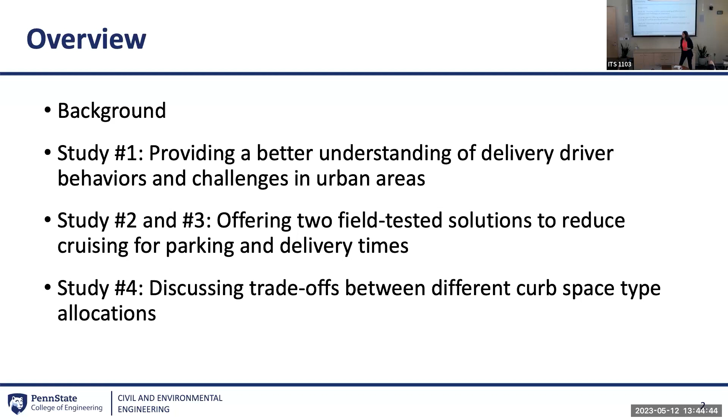Then I have 4 different studies that I've woven together to create a story about curb management and urban freight. The first one helped us better understand the behaviors of delivery vehicle drivers and the challenges they face in urban areas in finding parking. The second and third are kind of the solutions we propose for those, so I present 2 field-tested studies and the results of those. Then I want to conclude my presentation by discussing some of the trade-offs between different curb space type allocations. So let's start with why this is important.

There are 2 parts to this: a supply part and a demand part. I don't think I need to explain to any of you in this room that e-commerce has been booming over the past couple of years, with exponential growth in e-commerce and people ordering things online and waiting for their deliveries.

At the same time, our cities, our streets, our curbs are not quite ready for that. This one is from the Seattle DOT, and it shows that only a small percentage of the curb space in urban areas is dedicated to commercial vehicle load zones, CVLZ. I'm going to mention that quite a bit during my talk. So CVLZ stands for commercial vehicle load zones.

So that creates the issue here. As you might have heard about, or might not have paid so much attention to, it creates insufficient curb or parking space, which also increases some of the parking externalities.

So when commercial vehicles do not find a place to park, they show different behaviors. They search for parking, going around the block. They may park in the travel lane, causing congestion issues. They may idle, causing emission issues. All of these result in some of the externalities of congestion and emission.

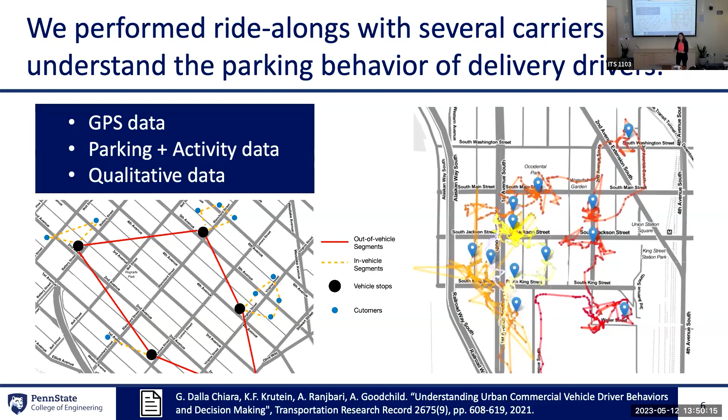So I'm going to share some of those with you, but basically what we did - those students who were riding along with drivers collected GPS data. In addition to the GPS data, we collected some of their parking data, like where they park, how they perform activities, and some qualitative observations that the GPS data alone cannot tell you. This additional information helped us later on to better understand the patterns in the data.

So let's take a look at some of them. We found that delivery vehicles actually spend most of their time parked - 80% of their time they are parked. That tells you a little bit about the scarcity of curb space, the lack of enough curb space. We also found that they are trying to minimize conflicts with other vehicles.

Some of you might have seen a FedEx or UPS truck parking somewhere you don't like to see, but you don't really know the decision making behind that. They were trying to minimize conflicts with other users, trying to stay safe. There's a lot that delivery drivers do, and when I mentioned it was fun, it also helped all of us appreciate the work of the drivers, because we got to experience firsthand some of the challenges they were experiencing.

We found that, despite the common belief that commercial vehicle drivers want to park in travel lanes, actually less than 5% of the time does that happen. But maybe because they are big vehicles and noticeable, you see them and feel like that happens all the time. In terms of where they are parking, we found that...

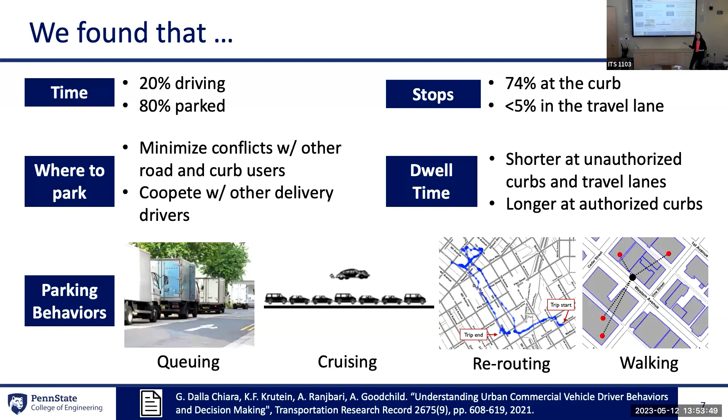Those are some of the behaviors we saw, which in general we can classify into these four areas. Now, with that understanding, what can we do? What are some of the solutions we can offer?

We studied two different solutions that I'm going to talk about, and we field tested them. These are both pilot studies and empirical research. One is parcel lockers, the other is providing curb availability information to drivers. I'll start with the first one.

By parcel lockers - just to make sure we all understand, since I know you have different backgrounds - they are multi-compartment storage systems where you can order something online and it will be delivered to the locker. They have a digital keypad, so you receive a code that, at your convenience, you can enter to redeem your package. You might have seen Amazon lockers in town, or some of you in apartment buildings might have those.

So parcel lockers are emerging as a potential solution for addressing some of the delivery issues in the last mile. Why? Well, if you don't have a locker, you have to deliver to multiple locations. If it's an apartment building, you have to go to multiple floors to deliver to all of those. If it's a neighborhood, you have to go to multiple addresses to deliver the package.

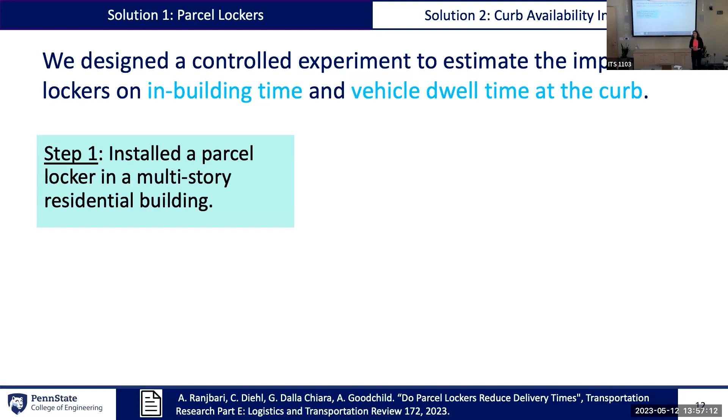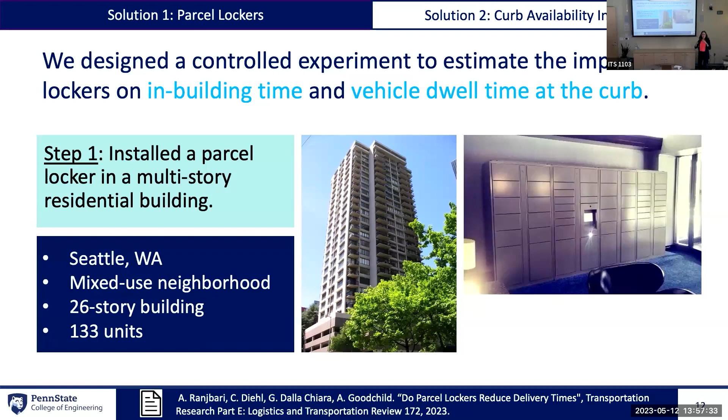The first step was to install a locker, so we took on this ambitious research and installed a parcel locker in a multi-story residential building. I won't bother you with all the steps we took, but the whole project took a year and a half, and a good 9-10 months of that was just this first step of installing the locker, getting all the paperwork, agreements and permissions sorted out.

So we installed the locker in this building, and then we decided to collect the data. Do you see the white parts?

Barely. Okay, we collected the data before and after the locker installation in our study building and a control building. If we were just looking at our study building and seeing how much delivery times changed before and after the locker installation, we could have overlooked something. There could have been changes in traffic congestion, weather, patterns, and so on. So we wouldn't know if it's just the locker or different impacts.

So we designed a controlled experiment. We picked another building very similar to our study building, same size, same number of households, same neighborhood, experiencing the same traffic congestion, as similar as it could be. And so we collected the data for both of the buildings before and after the study.

And we applied a causal inference method. Basically, the fundamental assumption of this causal inference method is that because these two, treatment and control buildings, are the same, they change in parallel. So those are the parallel lines that show that. They change in parallel, and if they don't change in parallel, then the difference is because of the only thing that is different, which in this case is the locker.

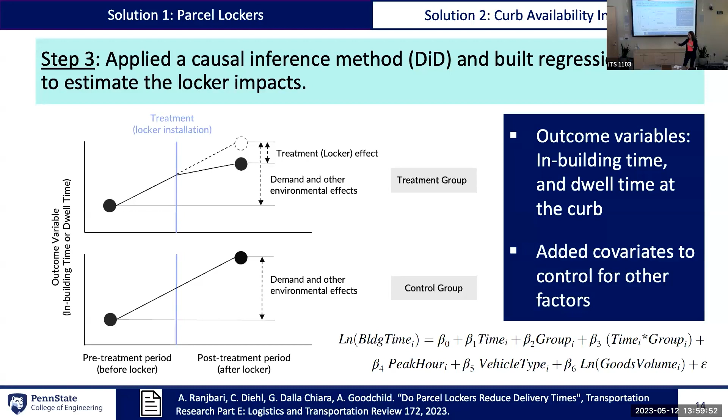So we collected the data and we built regression models using this method, and we control for several factors so that we make sure that any change we see is because of our treatment, which is the locker being installed. And so we control for multiple factors, and this is what we found.

So, clear final results. I'm happy to answer questions about the methodology, but I'll just give you the gist of the final results. We found that on average, lockers reduce delivery times inside the building by 50%, and they reduce the time that vehicles are parked at the curb by 30%.

This is the first empirical study that provides measures of how effective lockers are in reducing delivery times. And so that gives planners, policymakers, and decision makers an estimate, some benchmark of how effective this solution is.

Moving on to the next one. So the second strategy that we wanted to test was providing curb availability information to the drivers.

What do I mean by that? You probably use Google Maps all the time for different purposes, for navigation. Now, if you use it for parking, it sometimes tells you that parking is available. It's like, it's scarce, it's busy, not too busy, and so on. But it doesn't provide exact information.

And for commercial vehicles, that's another thing. Remember those behaviors that I mentioned, that if they don't find parking, they may have to go around the block, they may have to double park, they may have to form a queue, or so on.

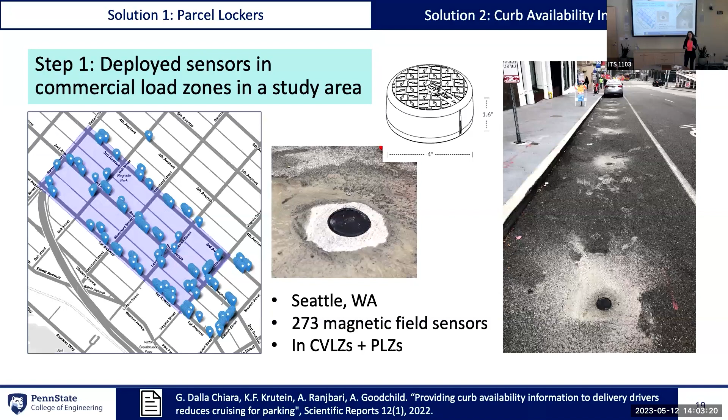So we installed sensors, commercial sensors, in a study area in Belltown, Seattle, Washington. We installed magnetic field sensors in CVLZs, commercial vehicle load zones, and also passenger load zones, because in Seattle they are next to each other, exactly adjacent to each other. And then based on the information that the sensors were giving us, that was real-time information.

And with our partners at the Pacific Northwest National Lab, we also use historical data and some machine learning techniques to come up with predicted occupancies. So we would have not only if the space is available or not, but if it will be available in 5 minutes, 10 minutes, 15 minutes, based on the historical data.

All right, so the app was built. Now we had that app, so we could do our research. Is that effective? Does that really reduce the cruising time for delivery drivers or not? So we designed a randomized experiment. Again, similar to the locker research that I mentioned, we had a treatment and a control group. Treatment would be delivering with the app, control would be delivering without the app.

So we created some synthetic delivery manifests. So you're the driver, this is your work for today. You have to go to these addresses, deliver this many packages, and start at this time, end at this time. We hired drivers to perform those synthetic deliveries, and we collected the data. So we collected GPS data and all of the others, similar to the first research that I mentioned.

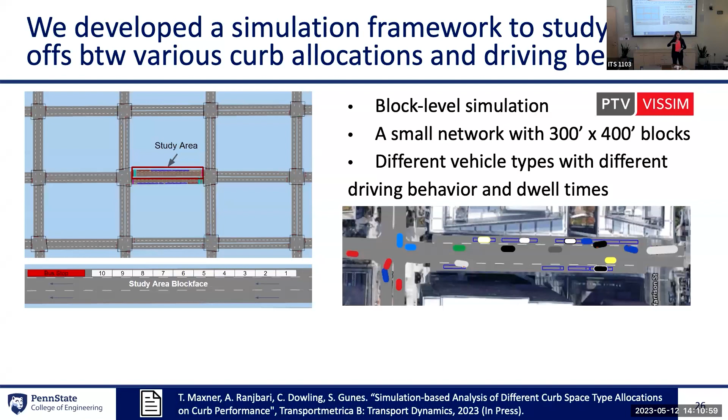So we developed this at a block level. We considered some different blocks next to that so that we can have the flow of the vehicle in the model, but for the performance metrics we use at that specific single block. We use different vehicle types, different driving behaviors, and our research question was, how do different curb allocations and also drivers' compliance impact the performance of the curb?

What do I mean by driver compliance? So let's say this portion of the curb is for commercial vehicle load zones. If you are a delivery truck, you can use that for loading and unloading goods. But do drivers use it or not? Maybe, maybe not. Maybe they just park somewhere else. Remember what I mentioned at the beginning? They want to minimize conflicts with other users. They want to be safe. So even if they have a designated space, they may not use it.

The same thing for paid parking. We don't always park at paid parking. We should, but sometimes it's closer to our destination. So we just make a quick stop, drop off someone or pick up someone and then go. So driver compliance is a different part of that. We try to introduce some variations in the model to also account for that.

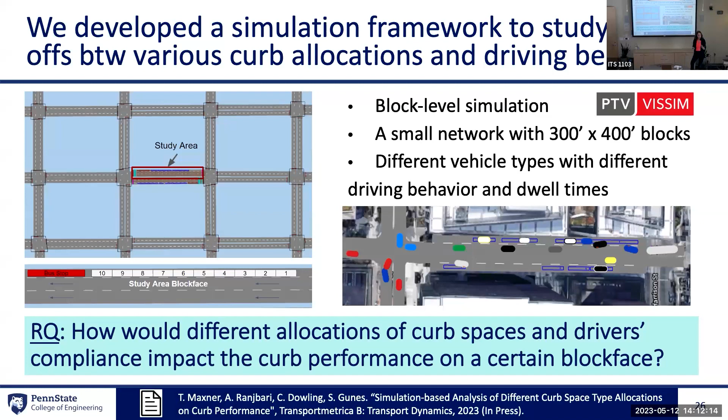So we defined several curb performance metrics. That was the first thing we did, for people and goods. Traditionally looking at these performance metrics, people have been looking at the passenger metrics - the productivity, the accessibility, and so on. Well, what about goods? In addition to how many people can this block face serve, how many goods can this block face serve? It's accessible for passenger vehicles - what about commercial vehicles?

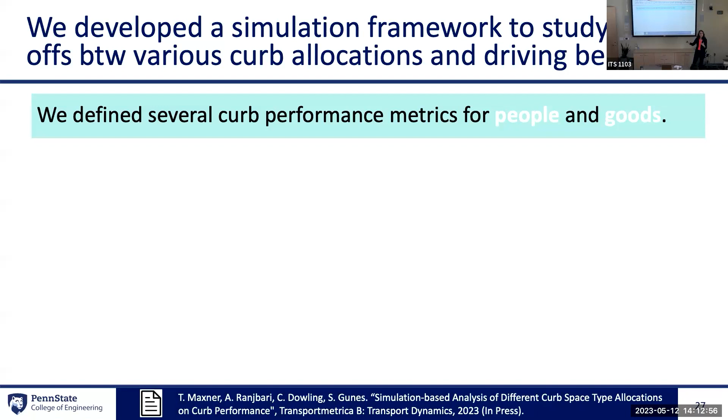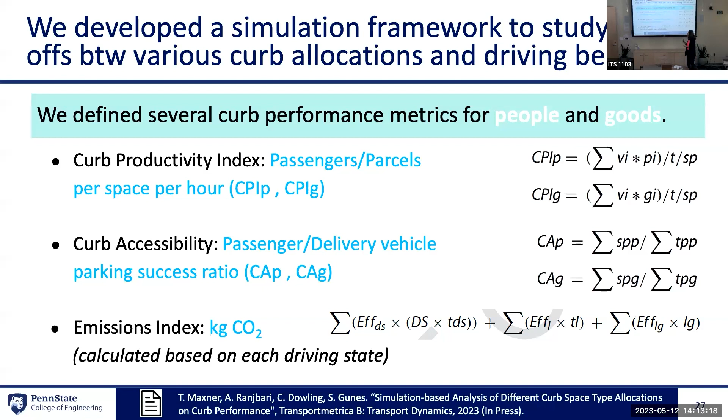So one of the contributions of this work is actually defining metrics not only for passengers, but also for goods. So we defined a productivity index - how many passengers or packages are served per space per hour. We defined the accessibility metrics, and we also defined the emission index. For the emission index, we calculated different driving states - if it's driving, the emissions produced are different than when it's idling, than when the ignition starts. So we included all of those different states.

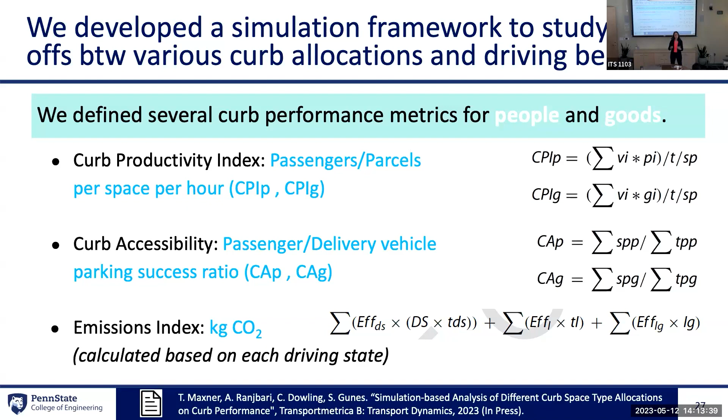So we defined these metrics for goods and people, and then we defined several scenarios. We had a baseline scenario where along the curb, it was all paid parking. Then we started changing those - change one of those paid parking spots to a passenger load zone, change one of them to a commercial vehicle load zone, maybe do both of those.

The PhD student I was working with became creative and came up with these names. So you see a 'Utopia' scenario where everybody has their own designated space and everybody's following the rules. Great. We also have this one, 'Fury Road,' where we have those spaces, but do they actually park in the designated authorized space? No. Do they double park? Yes. So we came up with those different scenarios which account for rule following, compliance, and also different curb allocations.

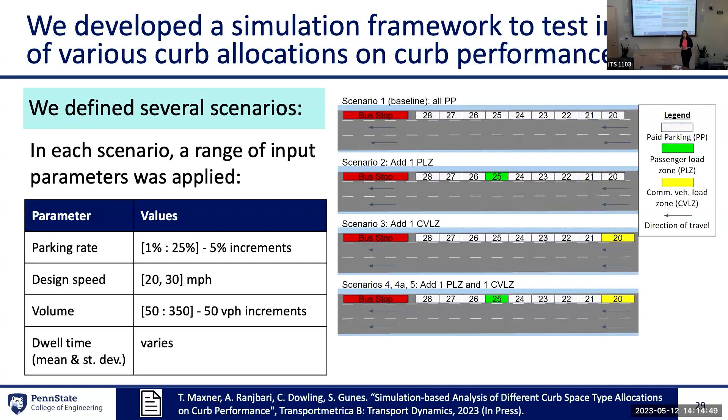We simulated all of those. For each of them, we had different ranges for the parameters, like the vehicle speed, the volume, dwell time, so that we make sure that we cover a range of scenarios.

And then we simulated all of those, and there are a lot of results. The objective of this study was to come up with trade-offs, so happy to share the results with you. The paper will be published soon, so I can share the details of the improvements, how much it's getting better or worse, but just the general findings here.

We found that allocating curb space for a single use, like CVLZ or PLZ, where a space is only for commercial vehicles or only for pickup and drop-off and others cannot use it, actually reduces paid parking attempts. It could reduce cruising for parking and emissions.

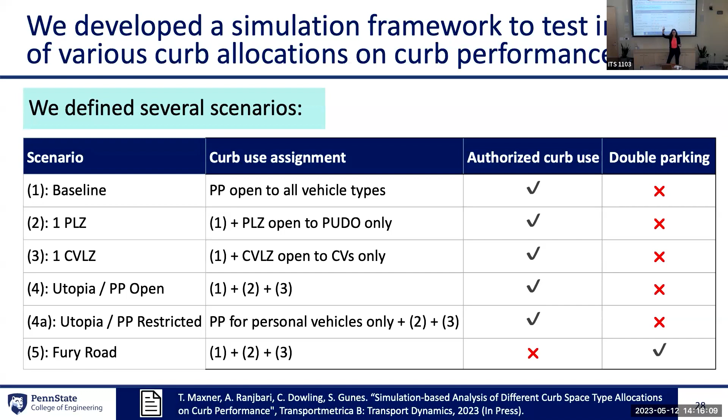Since one of my focuses is urban goods movement and commercial vehicles, we specifically looked at those. We found that in cases where commercial vehicles have to compete with others for curb space, remember for example one scenario was paid parking, PP, which is open to all vehicles so any vehicle can park there. In those scenarios, their goods metrics actually reduced, while other metrics, like passenger productivity or accessibility, sometimes increased. That's the whole reason we defined goods metrics separately, because we wanted to see the impacts on commercial vehicles.

It was only one of them at a time. Only in one scenario, when we added a CVLZ, did we see an improvement in the goods metrics and in emissions at the same time—emissions went down and goods metrics went up. That was the only scenario.

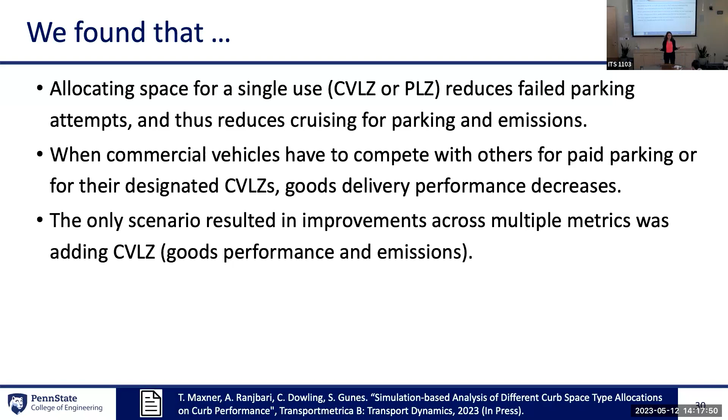So what does this tell us and why is it helpful? Curb allocation and curb management is a very complex process. This research helps cities make decisions based on their own goals—we're not coming up with a recipe that says we should all do this. For example, if a city's priority is to reduce emissions, they should go with the curb allocation that results in reduced emissions. If their objective is to increase goods productivity, they should go with that one instead. Based on their goals and the weights of different priorities, this simulation framework can help cities understand what strategy is best for them.

I wanted to conclude by emphasizing that this is a complex process, but the tools we are developing and the research we do helps cities, planners, decision makers, and policymakers with data, information, and tools to make better decisions. Thank you very much for your time.